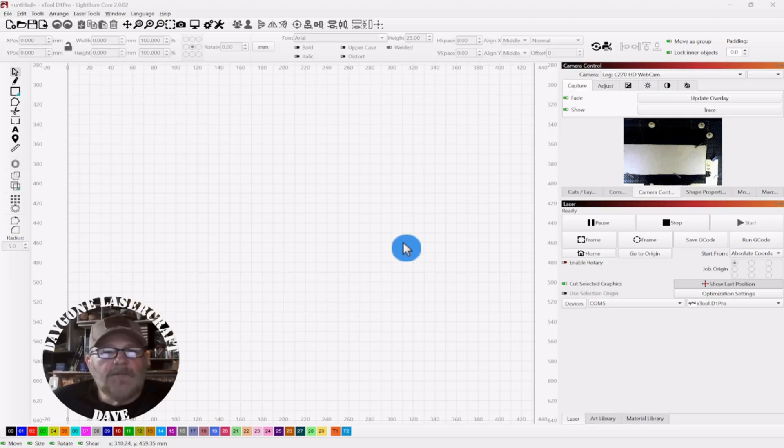So anytime you're changing to a material you haven't used, and I haven't used mirrors before, it's best to do a materials test so you can get your best result. And that's what we're going to do today.

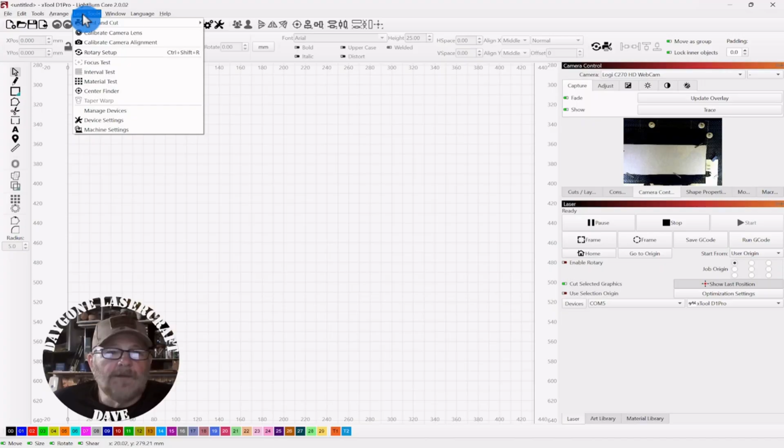So we're going to go up to laser tools and down to materials test. Now first, this Y center and X center is only adjustable because I'm in absolute coordinates right over here. So I'm going to change that to user origin. We'll go back and take another look, and you can see that it's grayed out. So if you want to adjust where the materials test is going to run, you need to be in absolute coordinates. It's just going to go to the center. It reflects the center of my laser bed, and that's where it's going to run.

Just always do a frame. Once you get it set up, do a frame, and then just move your object under the laser head. That's what I do. I think it's the best way.

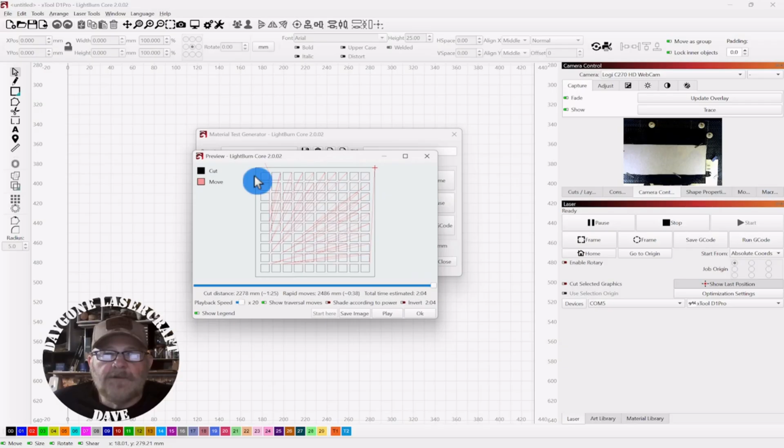So these counts up top, that's the number of boxes that will show in the materials test. Let's do a preview. And of course it is on another screen. So you can see that that's the number of boxes down and across.

Speed and power, of course. The minimum 10 millimeters, max 300 millimeters. Like I said, I've never done this before, so I'm just going to use these defaults and let it run. I don't know about this 100% power because I've got a 40-watt laser, and I guess worst case it'll just cut into the glass, so we'll find out.

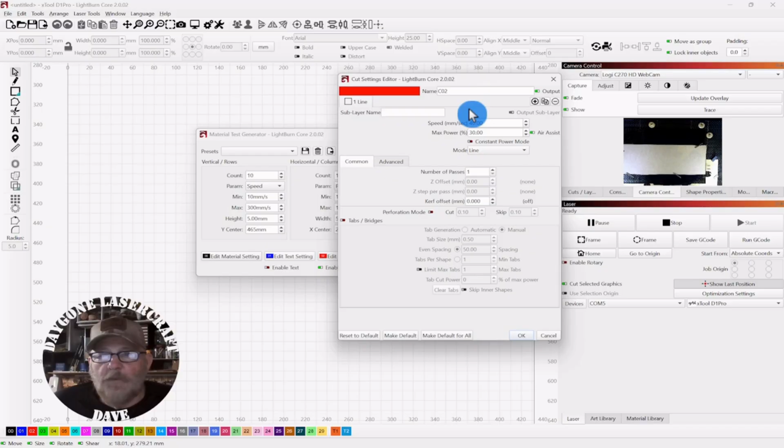These are the size of the boxes, 5 millimeters. We're going to leave that there. This edit border setting is if you were, say, doing a materials test on some wood and you do want to cut it out, then you can set this border setting to cut that out for you. Since I'm on a mirror, I'm just going to cut it off.

For this edit text setting, let's enable it here on the bottom. Take a look at the preview. You can see the text that's going to be on the materials test, and up top you should see interval as well, but that won't show until we get this set in fill mode on both accounts, the text and material setting. It doesn't show up for some reason, so that'll be a tip for you to know that you're not set properly. Also, the text and the block should be flushed in red because we have this show traversal turned on.

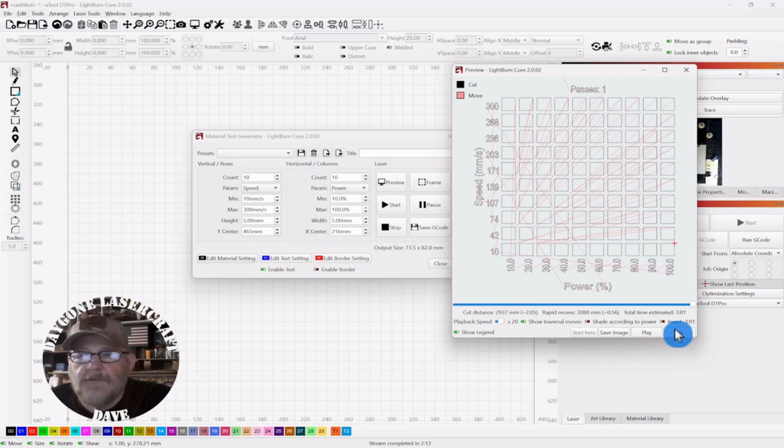And we'll go test that, see what we got. Click OK. We'll go to edit text, change from line to fill. This is just your last engrave settings. You may need to adjust it, but if you're comfortable, it will make a mark and show you the text on the test. Then you can leave it alone or change it.

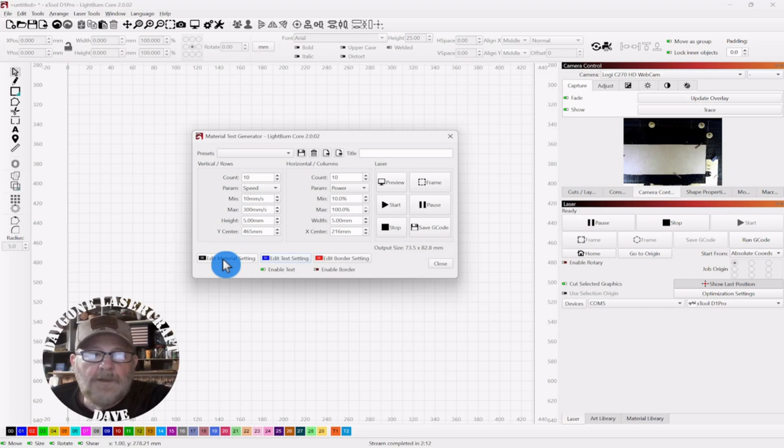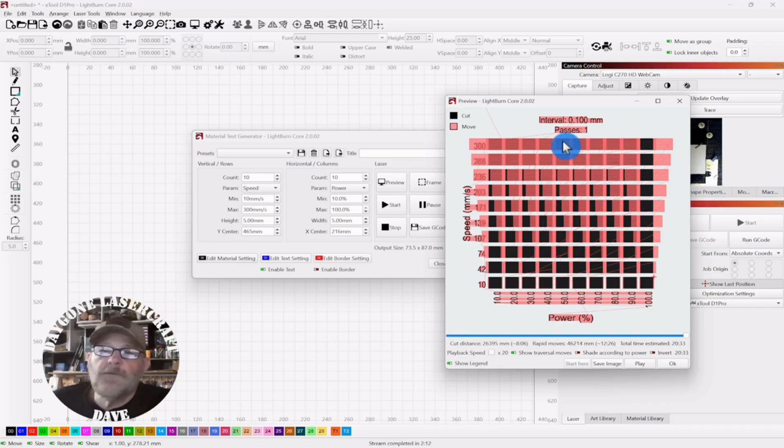Click OK. Let's go to edit material setting. We'll change that from line to fill. You don't need to change this speed and power because it's being controlled here. Click OK. Now we can go back to the preview, and you can see everything's flushed in red and interval is showing because we set it to fill. So if you don't see those things, you know you're not set right, and you don't want to waste your material having the wrong settings.

Let's click OK. All right, we can jump into laser, do a frame, get this set up, and see what we got. All right, folks, I'll be right back.

Okay, I've got a piece of cardboard down just to make it easier to slide the mirror around, and it'll absorb some of the light. If your laser bed was cleaner than mine, you may run the risk of getting some reflection back and damaging your piece of glass, your mirror. So we're going to run the frame, and then we'll move this around and get it just right.

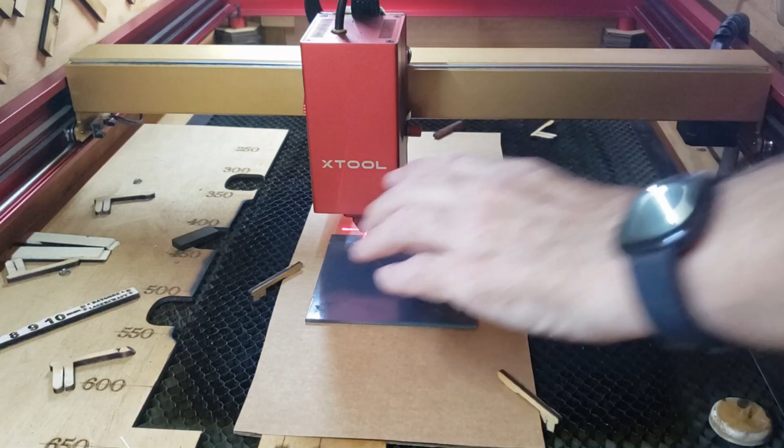That was pretty close. So let's run it again and we'll tape it down. That looks good. Put a little tape on it just in case it wanted to slide around. I am going to use air and exhaust. All right, let's run it and see what we get.

All right, so clearly that 100% power was too much. So let me clean this up and we'll get a closer look at it and see what we got. Maybe it's good enough I can at least tell what I need to do when I run a graphic. All right, folks, I'll be right back.

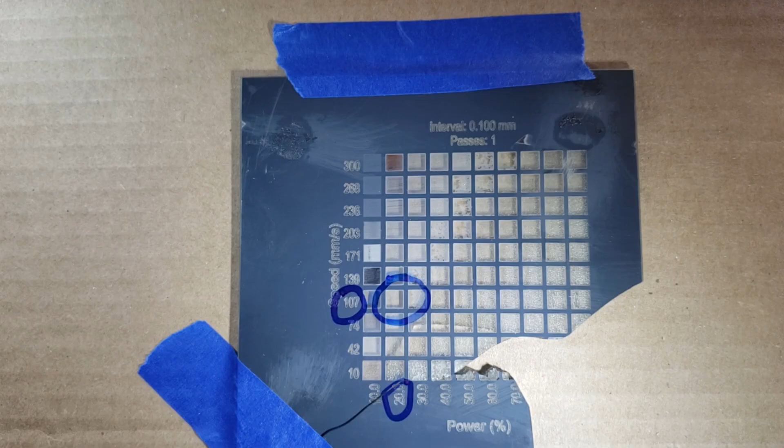Okay, well, here's the finished material test. It looks like that 100% power was too much. It actually started breaking up around 50 or so. But the best setting for a graphic is going to be something around 100 millimeters per second and 20% power.

Just remember, sometimes the backing on mirrors will be different between the types. So just stick with the same mirror or do another materials test if you change.

And I'll try this on a graphic, hopefully for the next video, and share that with you, and we'll see how that works out. And if I didn't give you enough information, just ask questions. I'm glad to answer questions anytime.